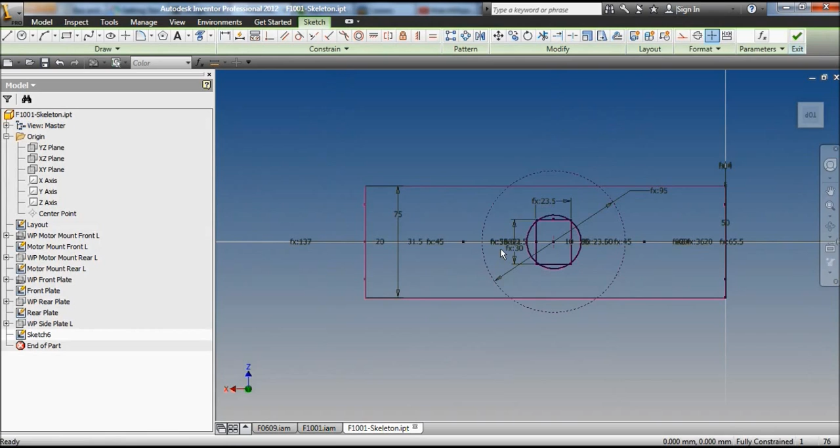Edit. New sketch. Rotate around so I can see. Beautiful. I'll project through this line and this line. Draw a rectangle.

Now instead of constraining corner to corner, that won't really work because we projected this plane, this part here, which projected it outwards. So if we put this corner on here, there's going to be no overlap, and then there's no real way of just screwing one part together unless we put angle in the corners, and then we'll add more bolts and stuff. Whereas this one here, I'm just doing ugly robot.

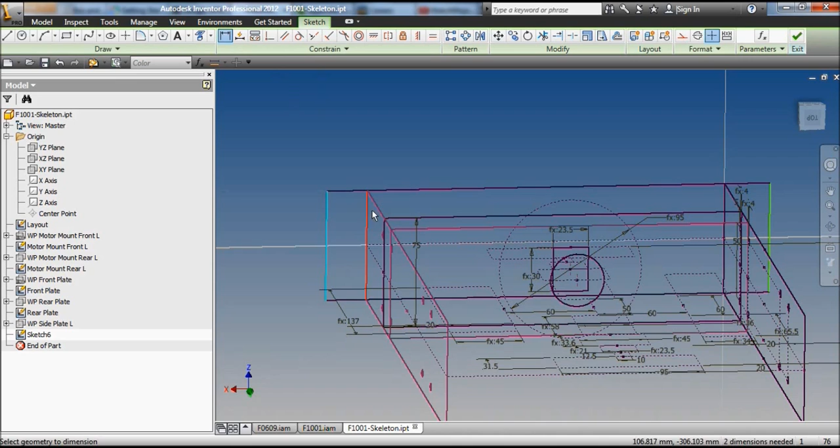So I'm going to constrain the top line to the corner, bottom line to the corner, and then make those there a distance of chopping board thickness. So there we go, an overlap.

We'll do the same to the other side. Chopping board thickness, beautiful. And then I'm going to put in a construction line. Up, down, done, turn off, make the center line that, horizontal center line that.

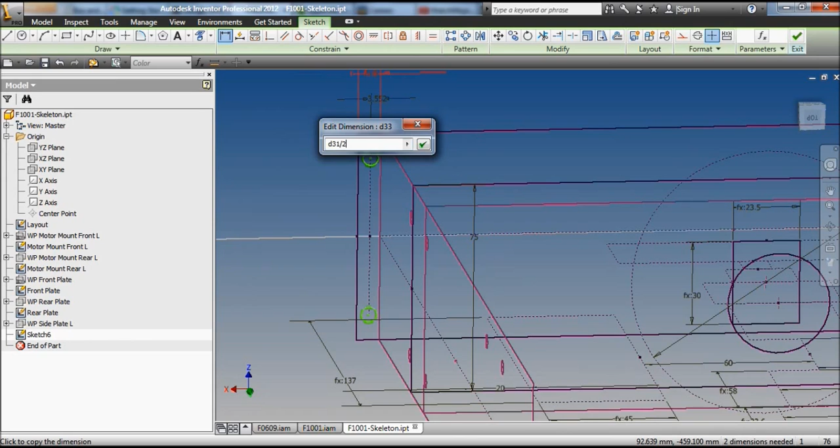Draw a hole on each end. Up, top. Make those two fellows equal to each other. Make that dimension, well, we'll do fancy, we'll go half of that dimension. So there we go, so now they're sitting directly in the center.

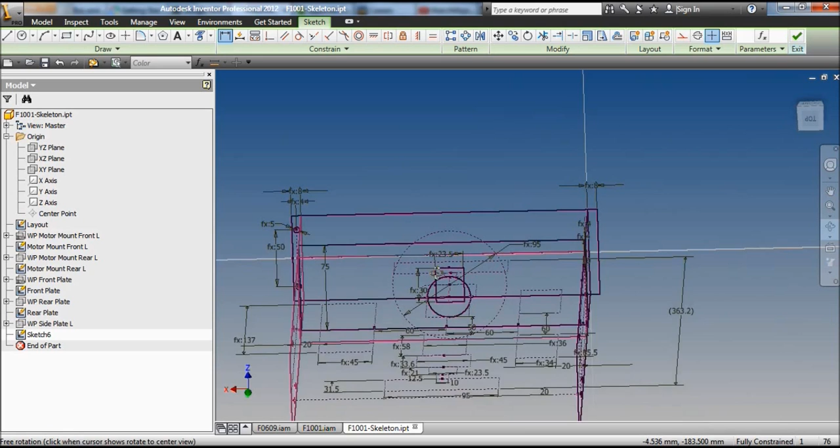The hole size, we can make it the same as this one over here, which is, where is it? That dimension. There we go. Update. Looks a bit close to the edge. You know what? And that one there can be the same as this one over here. 50. There we go.

And we do the same on the other side. We'll have our two mounting holes. Can make that construction line. Whoops. Random line. Center is horizontal.

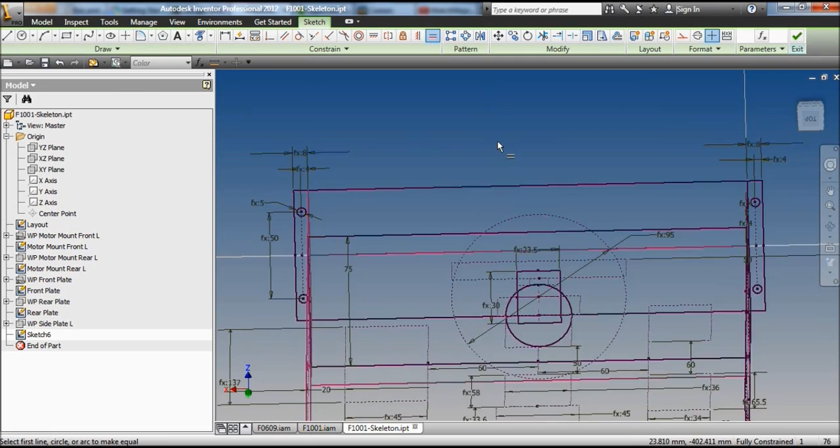Its length is the same as the fellow on the other side. It is half of the thickness away from the edge. It's got a hole circle attached to each end of it. The circles are equal to each other and equal to the one on the other side. There we go. Finish. And there's a sketch for the side plate.

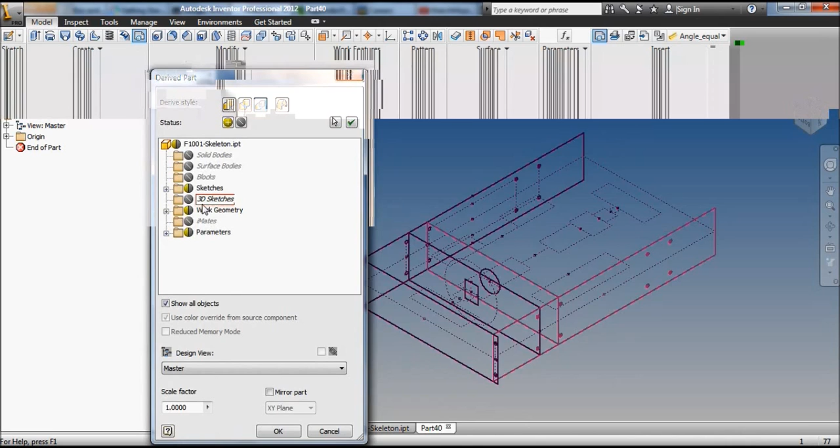Side plate left. Now I'm going to mirror it across the same way I mirrored those parts. So we'll just hit save, create new part, standard part, derive, find where simple's gone. And on simple, where'd you go? There you are. There's the skeleton opening.

Turn everything off. Select side plate. Select chopping board thickness. Select extrude. Extrude everything we want the other direction. Chopping board thickness. Okay.

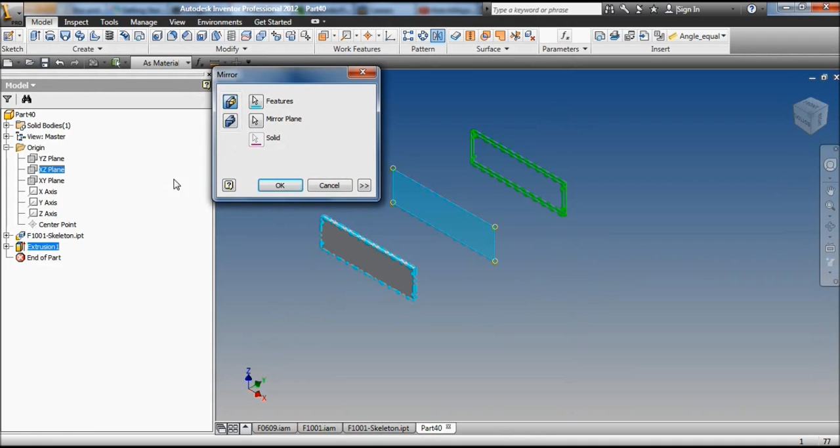Go for iProperties, physical. Scroll down to UHMW white. Apply. Close. Oh, forgot to mirror. Mirror that feature about the XZ plane. Okay.

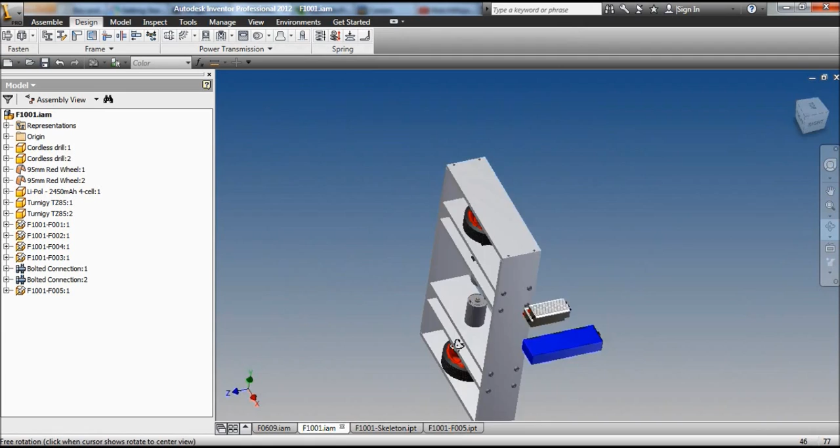Wonderful. Save that as F005. And copy that into the main assembly. Paste. iProperties. Occurrence 0, 0, 0, apply, grounded, apply, close. Awesome.

We're almost finished building a box with motors in it. Do a bolted connection on the ends. Okay, start plane, circular reference, finish reference, select the other circles, select the bolt after it thinks for a minute, and then decides it can't find anything, and then thinks again.

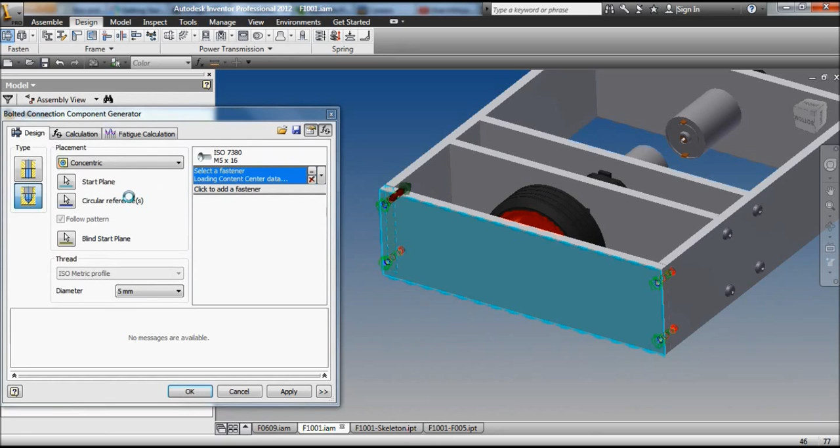And then decides it can find something. Round head, thingy what's it, with a couple of washers. Fun, apply, okay, beautiful, other side.

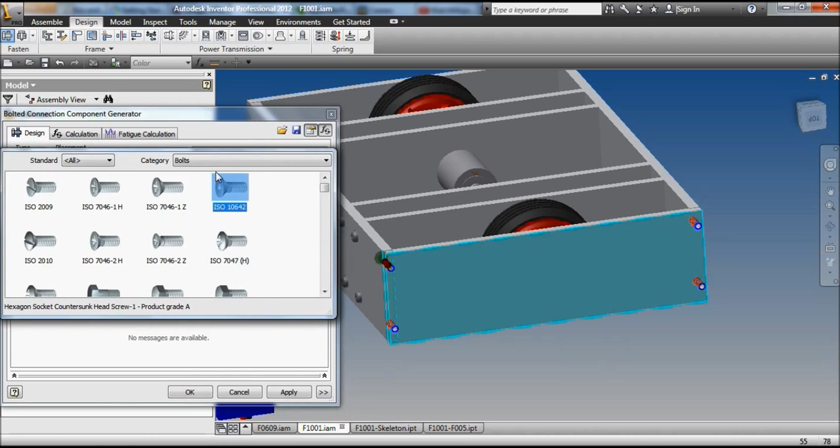Start plane, circular reference, end reference, other circles. Select the fastener, think about it. Thinking, thinking, thinking. Come on, computer. Round head. Washers. Apply. Done.

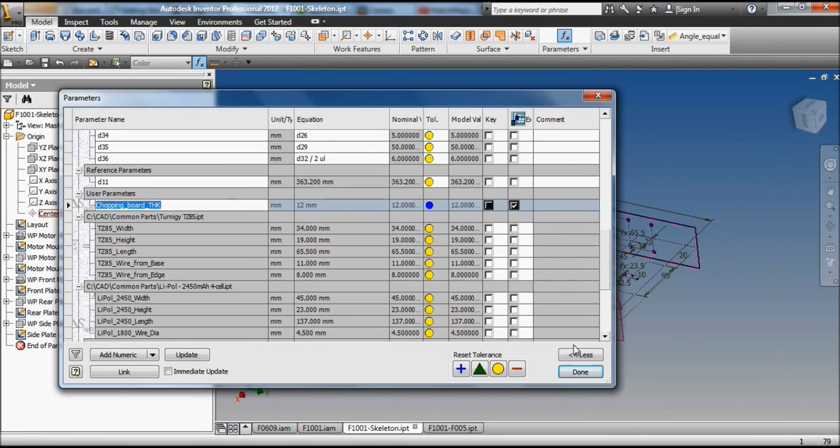I don't like how close they are to the edge. We almost need thicker material. Maybe we'll make some thicker material. So we'll go back to our original skeleton, into the parameters. Scroll down to the chopping board thickness. Magically increase that to 12. Done. Update. Things move. The holes look much better now.

Yeah, and those holes moved. They're now 6mm. They're in the center. Save that. Open this. Update.

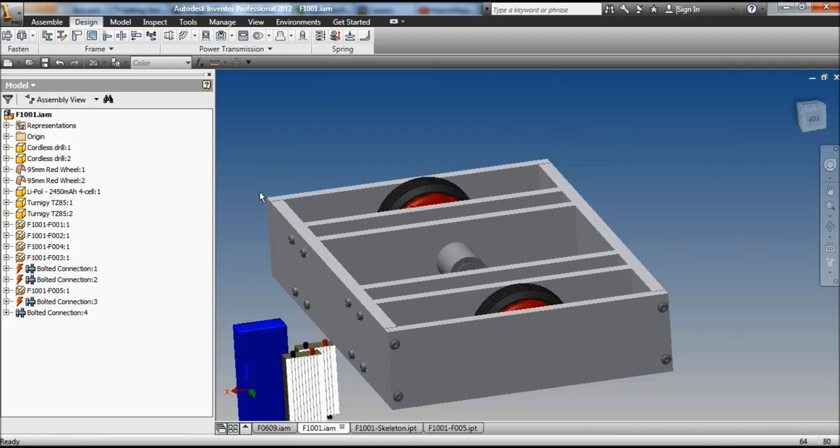There is one problem. I've always been annoyed with bolted connection. It makes putting bolts in so much quicker, but it never updates when you want it to. And I've always got these red lightning bolts, which means it needs updating. Which means you've got to edit it and then hit OK. And then it updates. Thank you for wasting my time. What over here? I think there's an automatic update button somewhere.

It's here somewhere. There we are. Component. Automatic solve.

But it doesn't automatically solve, does it? Where are you? Oh, there you are. You automatically solved. I don't know why it just doesn't select that to begin with. It makes things so much quicker to update, particularly if you've got a thousand of these things to do.

Sure, you have to sit there and wait for your computer to think for 10 minutes every time you hit update. Well, I'm patient. I'm happy to sit there for 10 minutes and make sure all the bolts are correct. I don't want to go through and do it manually—it's going to take 15 minutes. Some people just don't have patience.

Enough rambling. There's my robot. It needs a base plate.

Save it. Close the side plates, we don't need those anymore. We'll draw a base plate, which is pretty much the same as drawing the side plates and everything.

Select a plane that's parallel to it. Select a point that's on the bottom. There's a base plane. Rename it—work plane, base plate. Done.